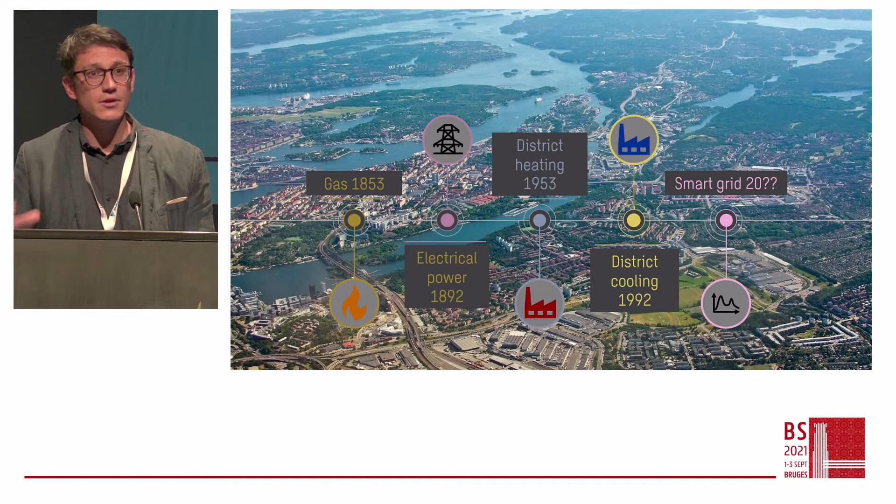In addition to that, we also have the industrial sites surrounding often densely populated regions. We should not consider them just as energy consumers, but we should evolve them to energy hubs, which helps transitioning their surroundings. If you go back to Belgium, in most cases when there is a debate about energy, it is a debate about electricity: what we're going to do with the power plants in the future, how we're going to accelerate the development of renewable energy production.

But if we look closer at the final energy consumption by source in Belgium, on this diagram electricity is highlighted, and not even 20% of our final energy consumption is electricity today. This is going to change due to electrification. I'm not saying that the debates about electricity are not important; on the contrary, they are important. But we cannot lose sight of the petrol products and the natural gas in our final energy consumption. There lies a very big challenge for us, because combined it is 75%, three quarters of our final energy consumption.

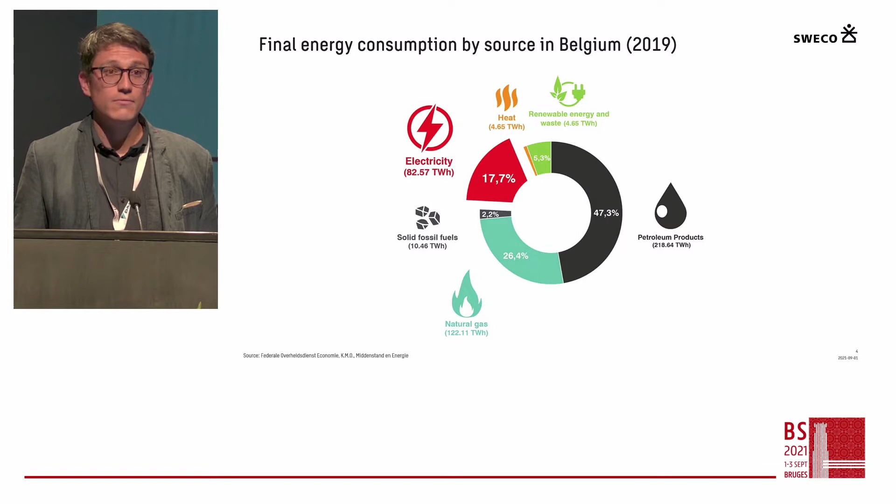There lies, for me, also the biggest opportunity to make a significant impact in the energy transition. And if we look at buildings and at the conventional heating systems, it is mainly natural gas today, so that's why we think that the discussion should not only be on electricity, but we should very much focus on petroleum products and natural gas.

When we see the transition to 2050, we have three main future energy trends. The first one is energy efficiency, and I think we all can agree that energy efficiency is very important, and we can decrease our overall energy consumption. But at the same time, we get an increase of electricity demand due to electrification. And electrification itself is a very good evolution, because in most cases the technology is more efficient. It's a technology that is easier to convert to green energy sources.

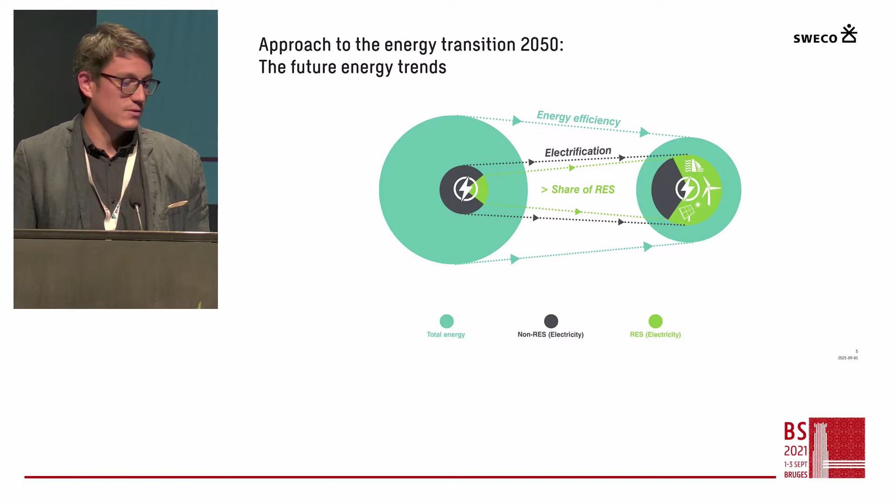But we have to quadruple our energy production in Belgium today to meet the future demands in 2050 due to the electrification. And not only this, we have to increase the share of renewable energy production, because today the share of renewable energy production in our total energy consumption only makes up 5.3% of the final energy consumption. If we zoom in on renewable energy production, we see that more than 70% is produced by sun energy and wind energy. So this is also where our focus should be when accelerating the development of renewable energy production.

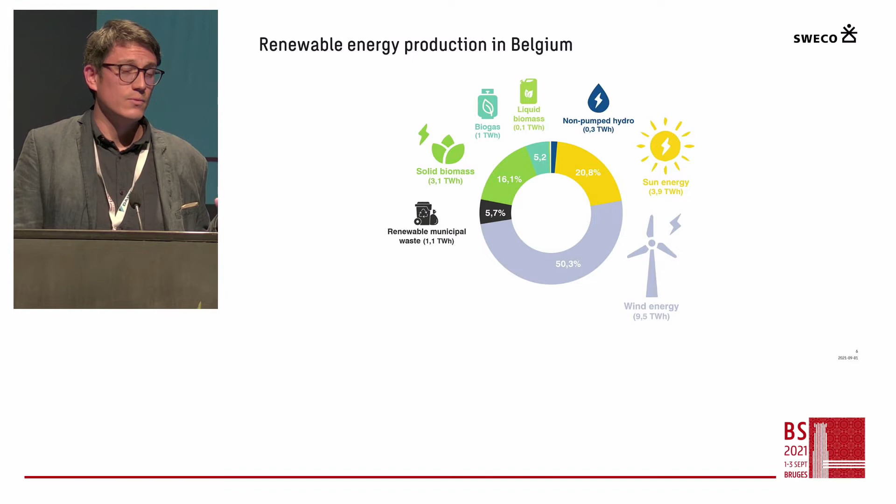But we have to take into account that these energy sources are variable, they are more decentralized, which means that this leads to a different kind of energy model than we are used to today. And we call this a paradigm shift. Today we are in an energy market and an energy model which is mostly centralized production, and you have production, you have consumption. And generation of energy just follows the consumption.

But with the increase of more and more renewable energy production, which is variable and decentralized, also with the shift of consumers to prosumers, and with the stress this gives to the existing distribution and transmission grid, it is important to balance our energy production and energy demand on a local level. This means that we're heading into this paradigm shift where we're going from a centralized energy model, and a market model based on it, to a more flexible, dynamic, prosumer-centric energy model. And I believe that initiatives like local energy communities, citizen renewable energy communities, will play a significant role in this paradigm shift.

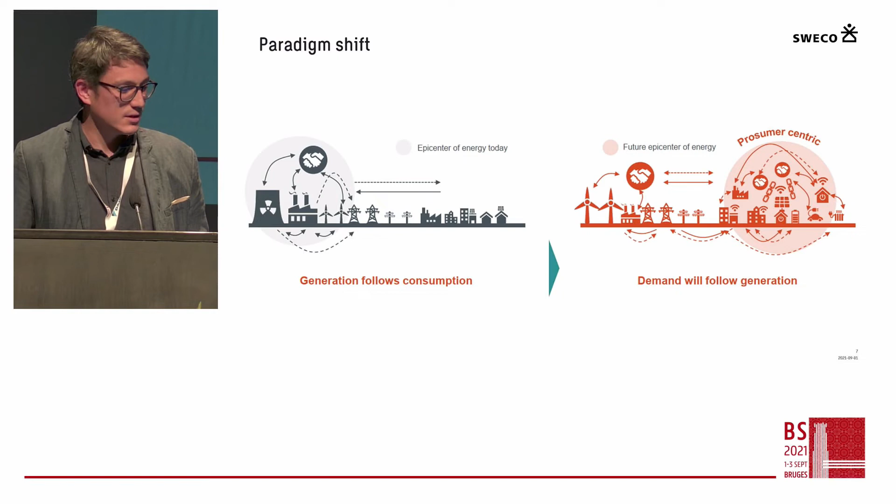That being said, now we should look at who these consumers of energy are. In this diagram, you see 5 different colors, but I like to talk about 3 clusters. The first one is the industry cluster. I'm taking the non-energy consumption and the industry together as one industry cluster, because the non-energy consumption is all about petroleum products and natural gas that are feedstock for the industry. We have the transportation sector, and then we have the domestic and services and assimilated. I like to take those 2 together and call it the buildings cluster. Those 34% with services and assimilated are about public buildings and offices. Each of these 3 clusters, industry, transportation, and buildings, faces its own specific challenges due to its own specific context.

If you look at industry, for example, they're already doing a lot in energy efficiency today. In Belgium, we have something like energiebeleidsovereenkomst, energy covenants, in which the industry engages itself in energy efficiency projects in their processes. But they face very big challenges that they're not ready to tackle yet. One of them is the massive feedstock that they use, consisting of petroleum products and natural gas, for which they do not have alternatives today on the scale that they need. Yes, there are bio-based initiatives, or you can use CCU, going from CO2 to methanol and other feedstock products, but they're not readily available on a large scale to implement in an economically feasible way. This is just a market at the industry level that is not ready yet to make this transition. They have this hurdle to take.

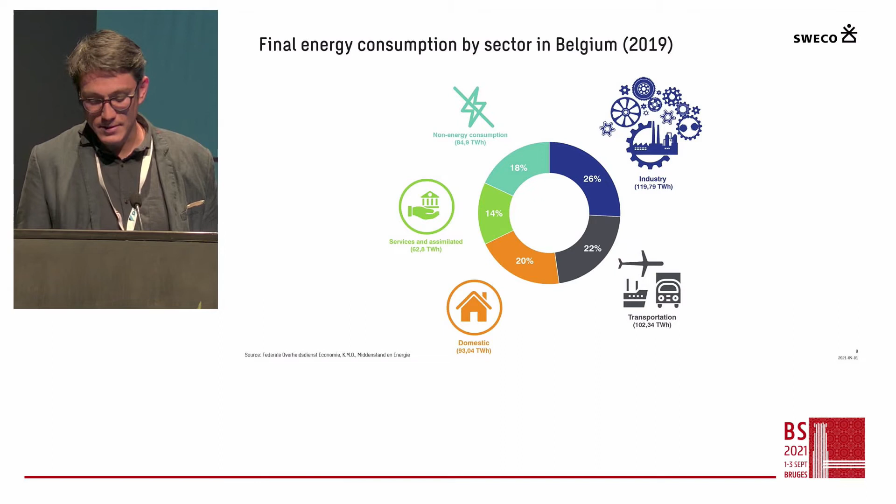Therefore, I want to bring you this time not to Sweden, but to Ghent. Ghent is a city, I think, 35 or 40 kilometers to the southeast of where we are right now. And we got the question from the city of Ghent to build a roadmap, an energy strategy, for a specific district, Muide-Meulestede in Ghent, to make it fossil-free in 2050.

And why did they pick this beautiful district? Because it has the typical socioeconomic mix, as you can find in typical neighborhoods in Ghent. It has very clear boundaries due to the water surrounding it. On the sides you have some industry, you have some offices. I think 50% of the buildings were built before 1950, and just to the north of this district you find the North Sea Port.

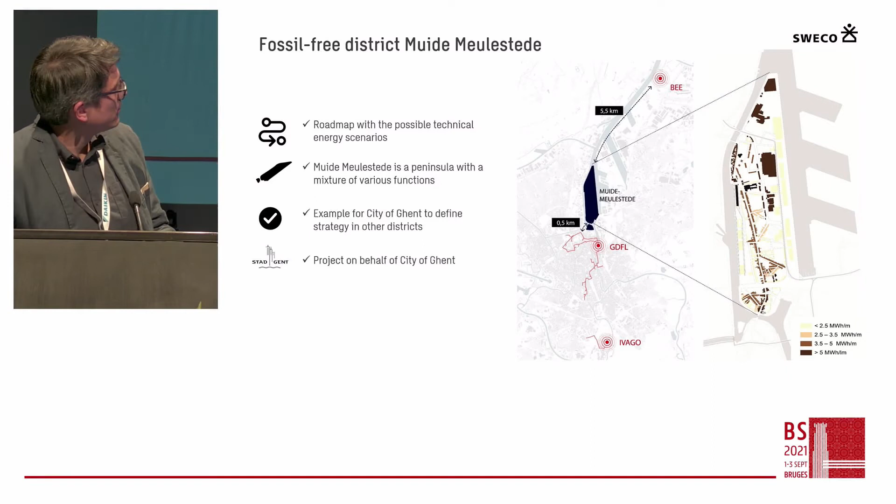And if you look here at the red networks, those are two existing district heating networks in the city of Ghent. The most southern is Ivago, which is a waste incinerator, and then you have GDFL. I think this is heat coming from a cogeneration installation. So they asked us, okay, we want a plan to make Muide-Meulestede fossil-free in 2050. How are we going to do this with this mix of buildings, with this socioeconomic mix, with industry?

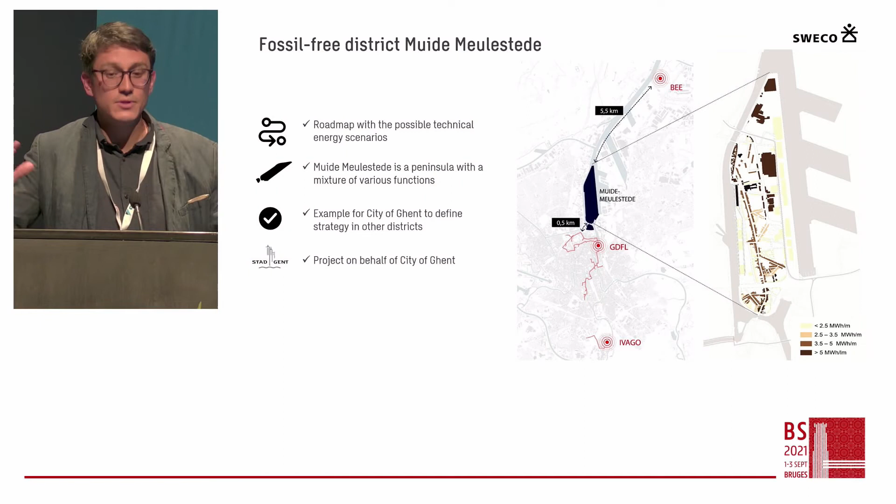And before we started, we considered that we had to keep in mind three major issues when it comes to energy transition on this level, so on a district level. The first one is that energy transition is also a spatial challenge. For example, you cannot use the same space two times.

Is there enough room under the street to implement yet another infrastructure, a district heating network, for example? Is this spatially the right location to add new wind turbines? Do we have space for a stationary battery on a neighborhood scale? So energy transition is also a spatial challenge.

Second, we have the financial challenge. First of all, this new infrastructure like a district heating network. To give you an example, investing in a district heating network in such an urbanized place like Muide-Meulestede would cost 1,500, maybe 2,000 euros per meter, which is a high investment on a long term. And it's very hard to compete today with the existing gas infrastructure and the gas prices.

On the other hand, we talked about the paradigm shift a few slides ago. It's not only a financial challenge, I think, but there are also some financial opportunities when we evolve to a more flexible and more dynamic energy market. And we already see organizations or stakeholders like cooperatives here in Belgium that are interested in projects like this. But for them, it's important not only to invest in the district heating network, but also to have some control in the energy balancing of the whole ecosystem of the district, because there they see their business case in the future flexibility market.

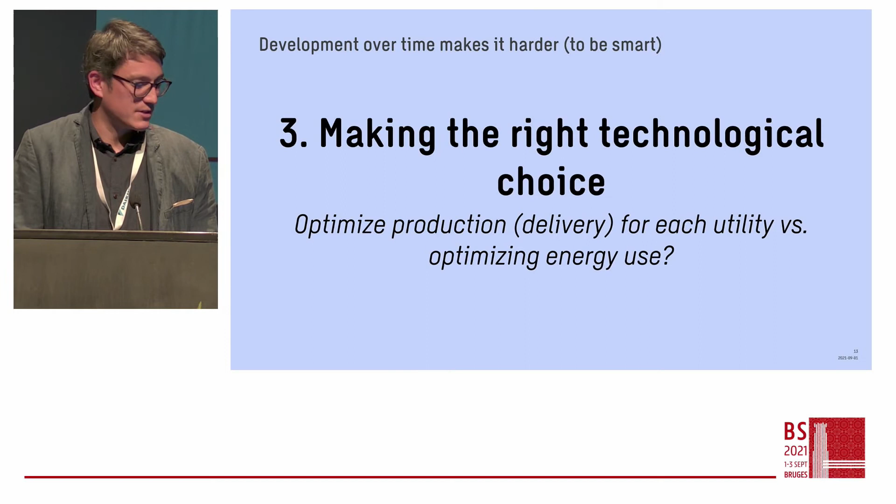So we started to put the puzzle together. We start with the modeling of the current and also the future energy demand of the district, working with a few scenarios. Always, of course, taking into account the urban and spatial development of the district itself. What are the future plans and what is the future vision of this district? Are there maybe important public infrastructural works planned? All these things we have to take into account.

Also, for example, in this case, there was waste heat available in the district of Muide, but how long is this waste heat guaranteed? Those are all questions that we have to take into account in our energy strategy. Next, we have the technology choices, heat, cooling systems, and then the distribution network, storage of energy. And this all combined should lead us to the roadmap, the energy strategy for Muide.

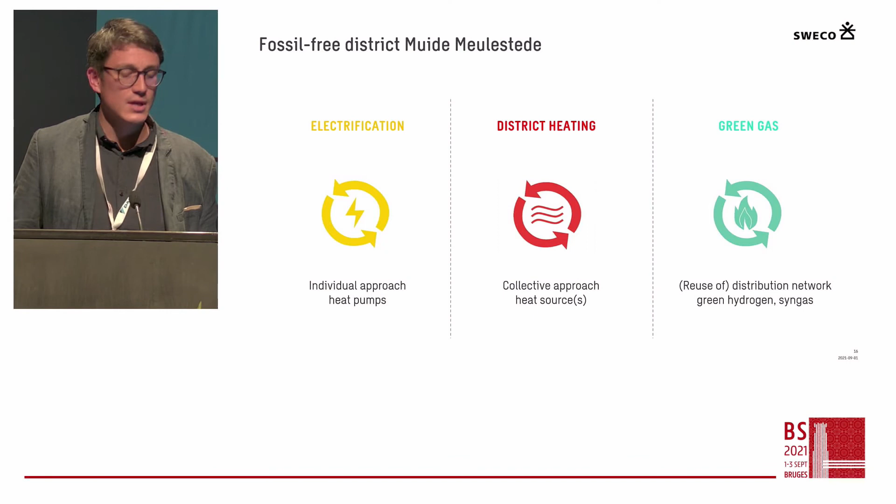And at the start, we looked at, okay, what if we apply electrification for the whole district, or what if we apply district heating at the whole district? And from there on, we started changing parameters, started looking at: you have this heat demand density over there, you have the source of waste heat over there, what is the impact of an extra kilometer of district heating network financially?

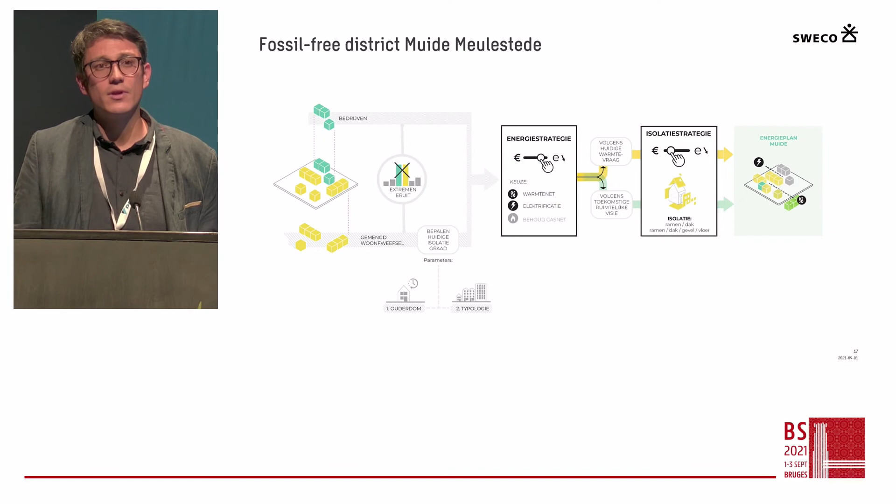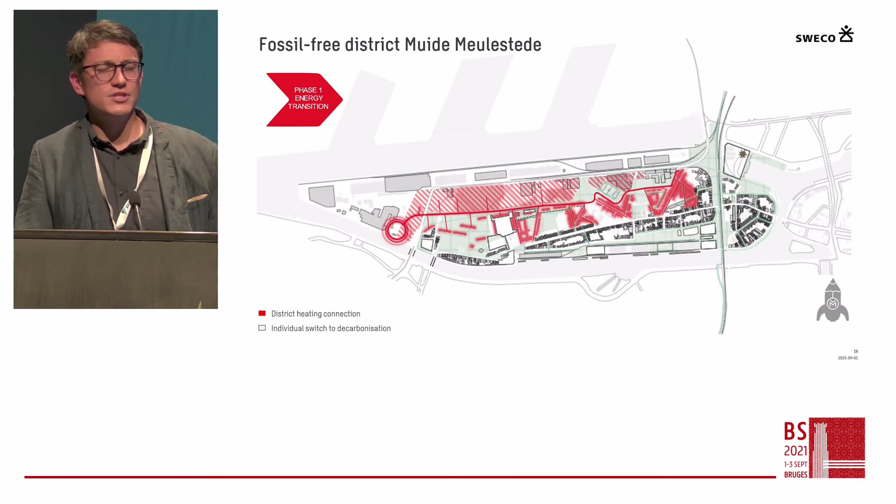What you should add to this is an extra layer of communication between all these different aspects in the energy ecosystem of your district. And this is back to the paradigm shift I talked about earlier. We have to, on a local scale, balance production and demand. We also have all these battery electric cars coming. It's not a good idea to have them all start charging at 6 or 7 o'clock when people come home from work at the same time. On the other hand, how can we maybe integrate them as a flexibility instrument in our energy ecosystem with V2G, vehicle-to-grid technology, and load balancing, and how can we use them for peak shaving?

This is the flexibility that is going to be needed in the prosumer-centric new energy model which we're going to evolve to. But this also demands a lot of monitoring and data: monitoring of production, consumption, performance of buildings, and all these things have to communicate with each other. And if this is not complex enough, then you also have the layer of the consumer itself, who has today its expectation of comfort, who is used to the availability of energy. So the consumer is another layer of complexity that we should always take into account when we are developing an energy transition strategy.

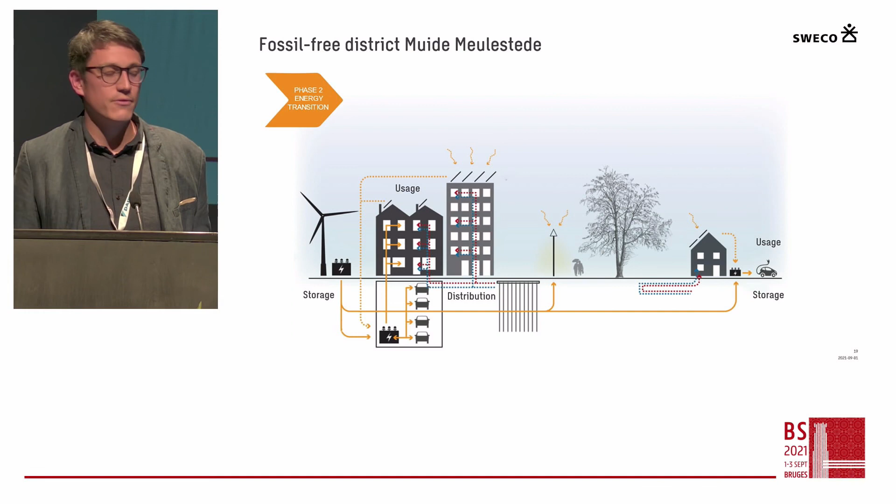And I want to illustrate this with a last example, the little town of Visby, which is close to Stockholm, so back to Sweden. This is a town where in the 80s they had to renovate their public infrastructure, so roads and sewage works. But the local authority had the idea: well, we're breaking up the roads today, we're putting new sewage systems in the ground. Maybe it's also a good opportunity to already put some conduits waiting underground, like empty pipes that can be used later. We don't know yet what we're going to use them for, but maybe it's a good idea.

So they did this. It was a little higher investment cost, but lo and behold, 25 years later, the whole telecom infrastructure of the center had to be renewed, and they could do this in a non-invasive and more cost-efficient way. So this is a perfect example of how you can make good, sensible choices for the future.